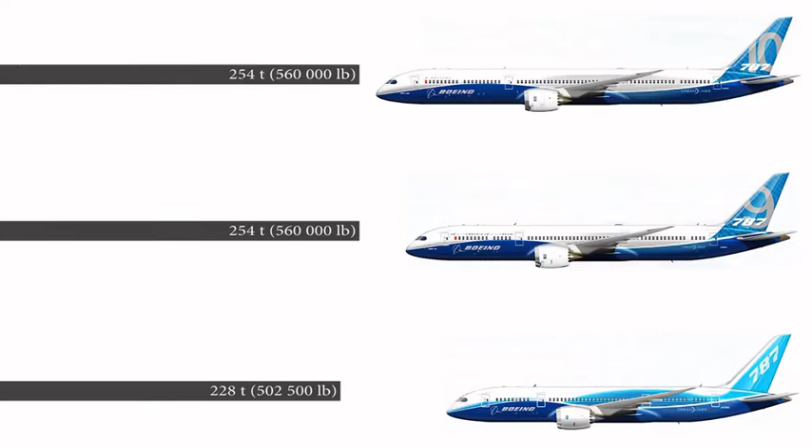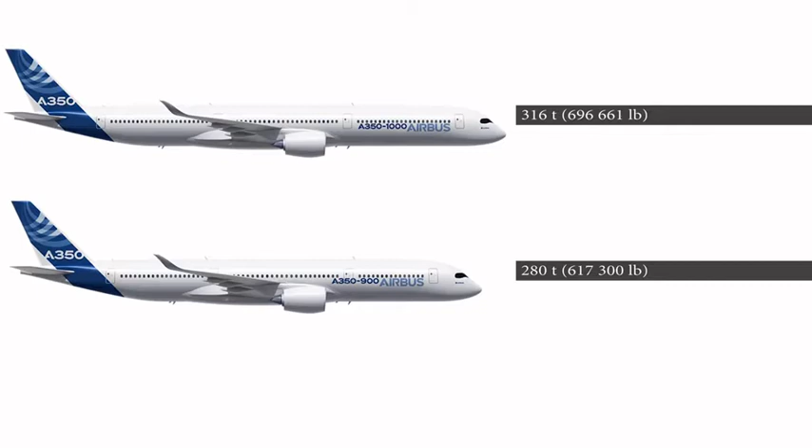Let's take a look at some figures. The Boeing 787 is a family that includes 3 models: 8, 9 and 10. Their maximum takeoff weights range between 228 to 254 tons, while the standard capacity in a 2-class configuration varies between 242 and 330 passengers. Since these planes were designed for long-haul flights, they have a maximum range of 14,000 kilometers, or 7,600 miles. Its counterpart, the Airbus A350XWB, is also a family that consists of 2 models, the 900 and 1000. Their maximum takeoff weights range between 280 and 316 tons, with a capacity of 315 and 369 seats respectively. Their flight range sits between 15 and 16,000 kilometers, around 8,500 miles.

So, what do we see here? The airliners of both companies coincide in their capabilities, but it is evident that the European brainchild is heavier, has a larger capacity, and flies farther than its quote-unquote rival. This can lead to the conclusion that, after all, the A350 is probably just better. There is no doubt that it is one fine plane, but the conclusion is wrong. The airliner does have a competitor.

It is not the Dreamliner, but its older brother, the Boeing 777. The Boeing 777 is the culmination of the twin-engine wide-body airliner concept, and it is also the biggest one of this kind. By the industry standards, the 777 is in the prime of its life. It is not the newest plane, but it is not even close to being old. This aircraft was developed in the mid-90s and kicked up a fuss by reimagining the market in quite a significant way.

Needless to say, in over 2 decades, this aircraft has undergone lots of upgrades, which nominally split it into 2 generations. The first one came about in the 1990s: the basic 777-200 model, its long-range modification 200ER, as well as the buffed-up Model 300. The second generation was born in the 2000s. The throne was inherited by an upgraded trinity: the long-range Boeing 777-200LR, the big boy 777-300ER, and the cargo 777F, which has a shorter range but can lift up to 102 tons of cargo. It is not the Galaxy, of course, but it's getting there.

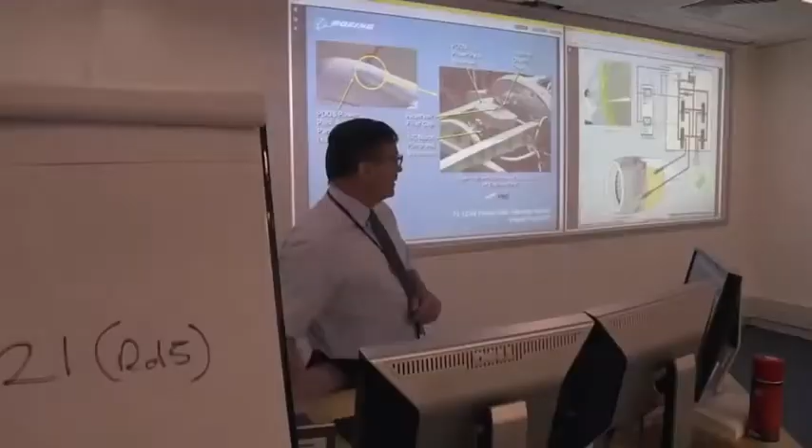The guys from Seattle became aware of this problem rather soon, and they started to develop a solution. The idea was simple: carry out a large-scale modernization of the 777 family, which would essentially result in the creation of the third generation. Better economy and flight performance had to be achieved with cutting-edge technological solutions, many of which could be borrowed from the Dreamliner.

The upcoming 777-8X had to replace the 200s, while the 777-9X would respectively replace the larger 300s. The competition in terms of passenger seats would be solved in the most obvious manner: each new model was a bit larger and had more capacity than their predecessors.

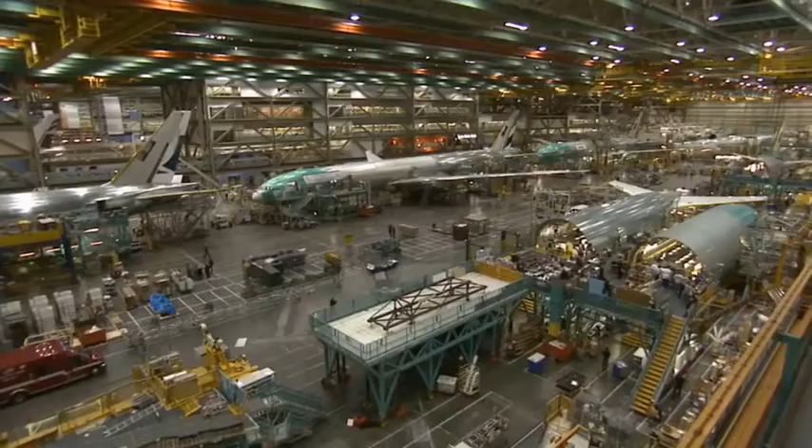Work on the project technically began in 2011, but was carried out silently and relatively slowly. Most of the resources were dedicated to finishing other programs. It was quite a busy time, but the project went on. Most of the Boeing divisions participated in its development, both in the US and abroad.

The 777X program was officially announced at the Dubai Air Show in 2013. That year, Boeing scored 259 orders, with a total cost of just under $95 billion.

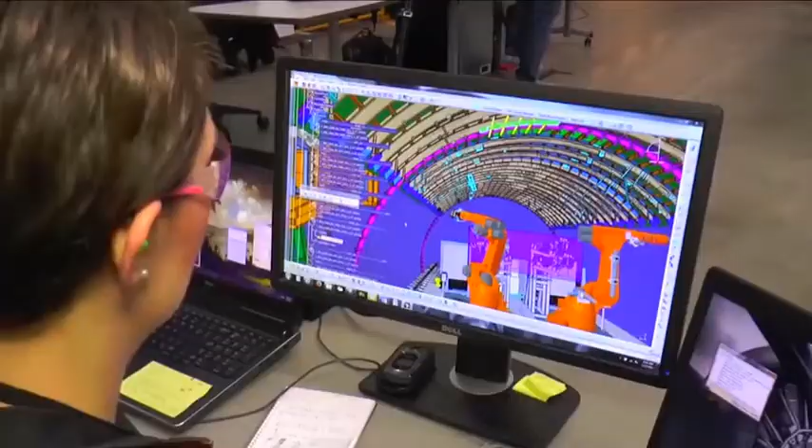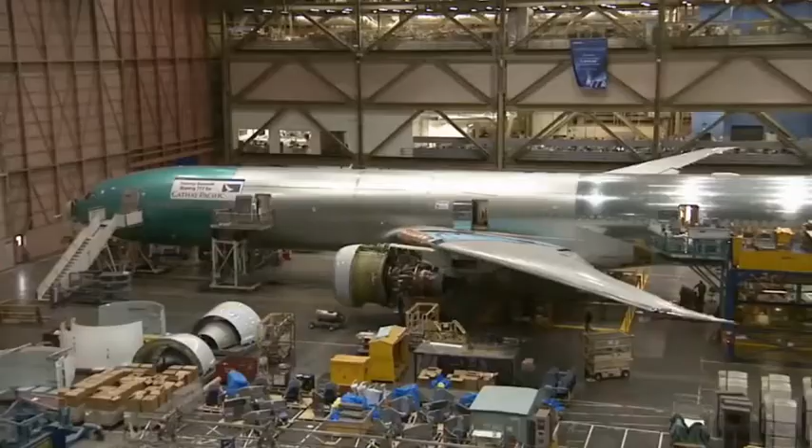The main stage of development lasted several years. The design of the basic 777-9 model was frozen in 2015, and it took another 2 years to prepare all the technical documentation, so construction of the first prototype began in 2017.

Design. Okay, let's take a closer look at what they've created.

In spite of being a cutting-edge plane, the Boeing 777X configuration remains committed to the classic configuration of commercial airliners. It is a wide-body aircraft with a slightly swept low wing, 2 turbofan engines suspended under the wing, tricycle landing gear, and of course a classic tail.

The first thing the aviators did to the fuselages was to stretch them, thus increasing their capacity. The old airliners of the version 200 have a length of 63.7 meters, or 209 feet, and can take in about 310-320 passengers in a two-class configuration. The Model 300 airframes are longer and more spacious, with a length reaching 73.8 meters or 242 feet, and a capacity of 396 passengers distributed in two classes.

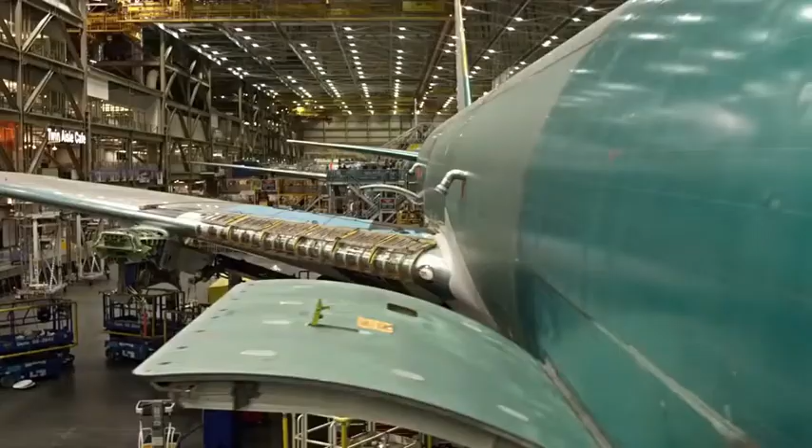Meanwhile, the airliners of the new generation have stretched fuselages, so they are a step above in terms of capacity. The 777-8 is 69.8 meters long and can fit 384 passengers in two classes. At the same time, the 777-9 has a length of 76.7 meters and is meant to take 426 people on board. It is the largest twin-engine airliner and the longest airliner overall. Even the 747-8 turned out to be shorter, just by a bit, but still shorter.

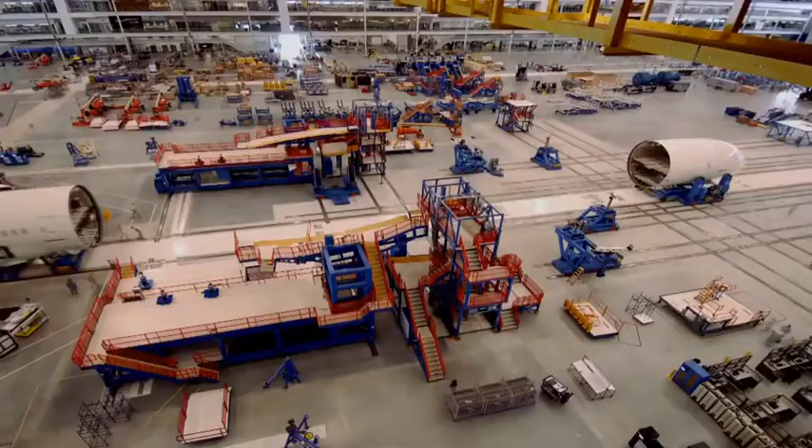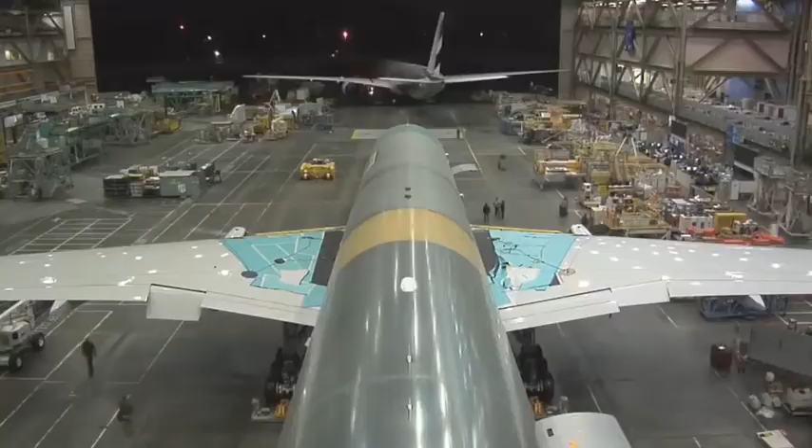The second stage was all about playing around with materials. Here Boeing showed its conservative side and did not rush to build a composite fuselage like with the 787. The Dreamliner is an entirely new airplane, and its airframe had to be built from scratch anyway. But the 777 is already here, with the manufacturing process set up and the industry already adapted to operate the classic versions. An overly deep modification would be an extremely complicated and costly enterprise, which obviously did not fit with the framework of the 777X program.

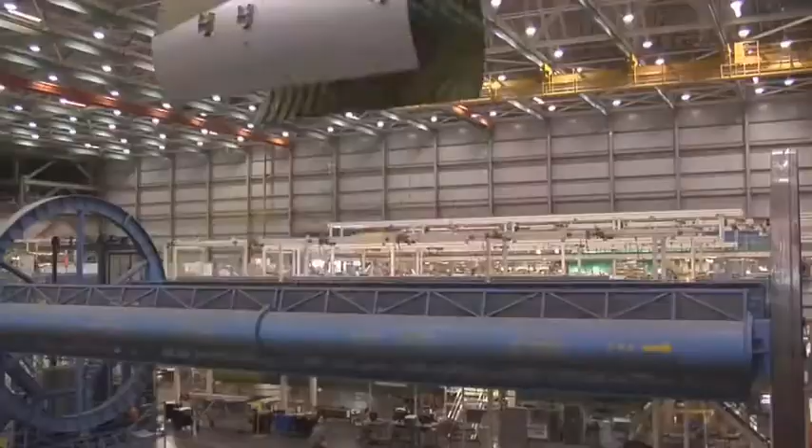After all, what we have here is a new generation, not a completely new plane. However, its fuselage is far from being the same. Most of the elements of both the structures and surfaces are made with new alloys. The amount of composites used is not beating any records, but they nevertheless allow the structure to be more light and optimized. The results of this work are seen both in figures and externally.

Let's begin with the bonuses for the passengers. Even though the diameter of the fuselage is the same as before, 6.2 meters or 20 feet and 4 inches, new materials and improved finishing allow the internal diameter to be increased to 596 centimeters, 234 inches, which is 10 centimeters more than before. Yeah baby, $5 billion were not invested in vain.

The second and more obvious bonus of using improved materials are the cabin windows. They grew in size by about 15% compared to the old 777s, and by a whopping 29% compared to the windows of the A350. It is a passion of all aviation companies to see who's got the biggest window in an airplane. Naturally, cool features like the electrochromic glass from the Dreamliner migrated here automatically.

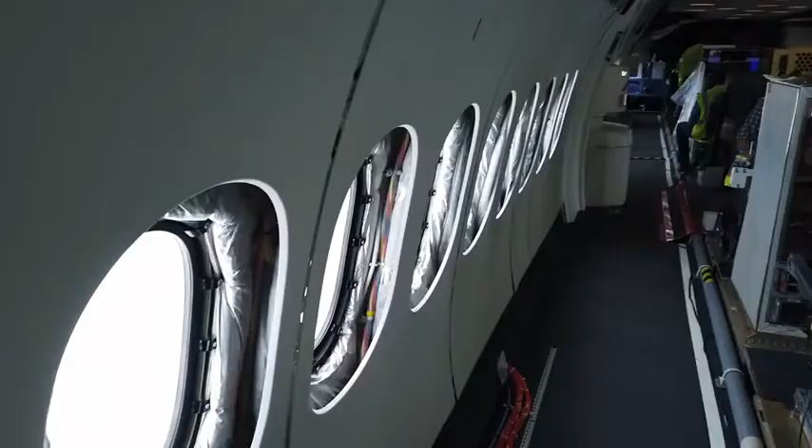Among other improvements there is a more silent cabin, new interior design, new overhead bins, illumination, temperature control, higher cabin pressurization, and comfortable humidity levels. All of these are benefits of the improved fuselage and some solutions inherited from the Dreamliner. You might not feel them right away, but on a 12-hour flight, these features may just come in handy.

The major innovation of the Boeing 777X is its new wing. It is almost completely made of carbon composites. On one hand, this allowed a reduction in the mass of the structure, and on the other, vastly improved the aerodynamic efficiency. Most of the solutions came from the 787, but here the wing is bigger, a lot bigger.

The wingspan of the Boeing 777X reaches 71.8 meters, or 235 feet. This is 7 meters more than in the airliners of the previous generation, and almost 3.5 meters more than that of the Boeing 747-8. Essentially, the wings of the new 777s are larger than any manufactured before by Boeing.

Such an elongation drastically improved flight performance, but became a problem on the ground. In ground operations such as taxiing, parking, and entering the hangars, the dimensions of the plane are of great importance, especially the wingspan. The biggest airplanes, such as the Boeing 747, Airbus A380, AN-124, and the C-5 Galaxy, require lots of space. This creates additional operational requirements and limitations, increases operational costs in the airports, and at the end of the day, makes life harder for the pilots and ground crews.

In this regard, the Boeing 777 had an easier time, with its wingspan of just under 65 meters, 213 feet, and it felt completely comfortable among such machines as the A340. But with the new wing, it would not fit in those old spots, which could lead to serious costs for the operators. Nobody even thought of making a smaller wing, as it would downplay the benefits of using composite materials.

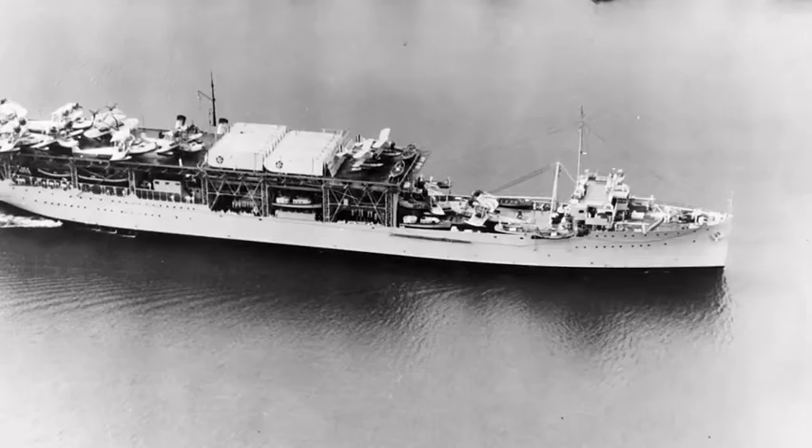So the aviators came up with a breakthrough solution, which was implemented 100 years ago in naval aviation. Aircraft carriers are some quite cramped airfields, and the airplanes on board are fitted with folding wings. This is what Boeing decided to do with the wingtips, which greatly increased the wingspan of the 777X while being relatively simple and light.

The new wingtips are attached to the wing with hinge fixing and can be lowered or retracted by electric drives. They have several strong locks that reserve each other, so that the wingtips wouldn't fold mid-flight. The configuration is changed while on the ground, before takeoff and after landing, and it takes roughly 10-11 seconds for the wingtips to fold, or around 20 seconds if we include the time needed for them to lock in position.

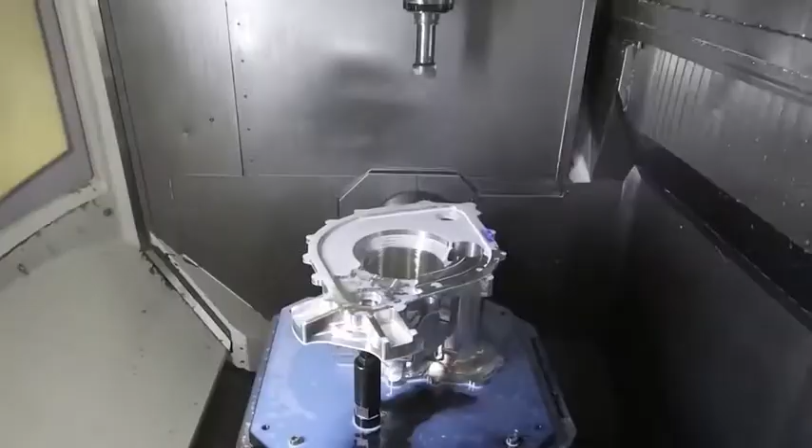The new mechanism and lots of additional metal do not simplify the aircraft, but make it much more interesting and solve the problem of the excessive wingspan. The unfolded wing has a span of 71.8 meters, which goes down to 64.85 when folded. This is 15 centimeters under the limit of the almost biggest airplanes category E, usual for the 777s.

The rest of the high lift devices are not as exotic. Big flaps, slats extended throughout the entire wing, ailerons and spoilers. More or less the same stuff you find on other planes. Rather simple, but still beautiful.

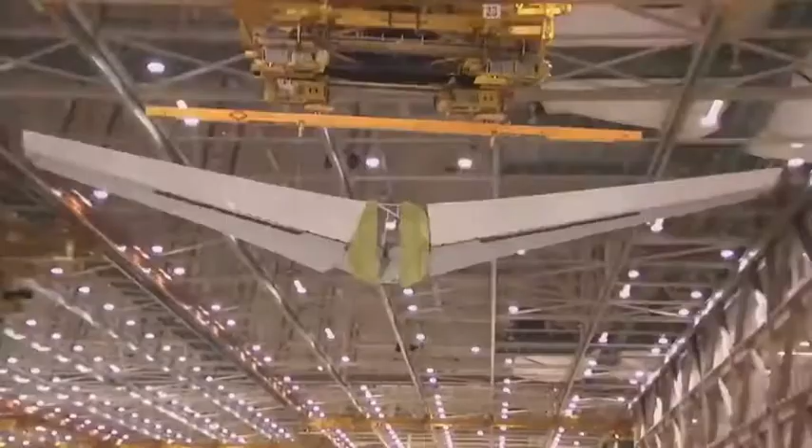The empennage is also almost entirely made of composite materials, and features lots of solutions found on the Boeing 787. But only to a certain extent, it has a somewhat simpler design. For instance, the hybrid laminar flow control systems on the tail stabilizers developed on the Dreamliner don't seem to be used here. Laminar surfaces are used on the engine nacelles, which, considering their size, improves the aerodynamics.

What's interesting is that in spite of all this fiddling with the structure, the maximum takeoff weight of the Boeing 777-8 and 9 is the same as that of the 777-300ER, about 351 tons. Technically, that is quite possible.

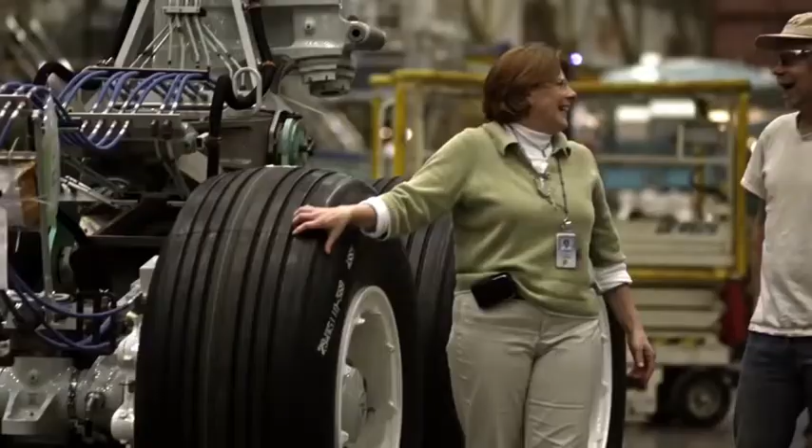The airplane got bigger and heavier by itself, but at the same time its structure got less dense, and its efficiency allowed a reduction in the amount of fuel needed. But it is still hard to believe that the figure turned out to be exactly the same. Perhaps this has to do with some certification or operational specifics, or it might have to do with the capabilities of the landing gear, which was barely changed. Or maybe there is some symbolic mysticism to all this.

351.52 tons is roughly 777,000 pounds.

Finally, we come to the burning heart. One of the particularities of the 777 is the killer ratio between the impressive size and weight of the aircraft and the fact that it has only two engines. From the moment of creation, these engines were record-breaking with their huge size and corresponding thrust. But the truth is that it also created a problem.

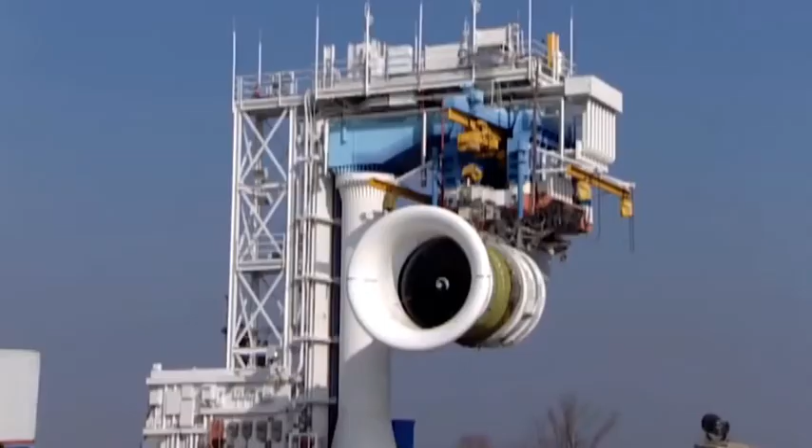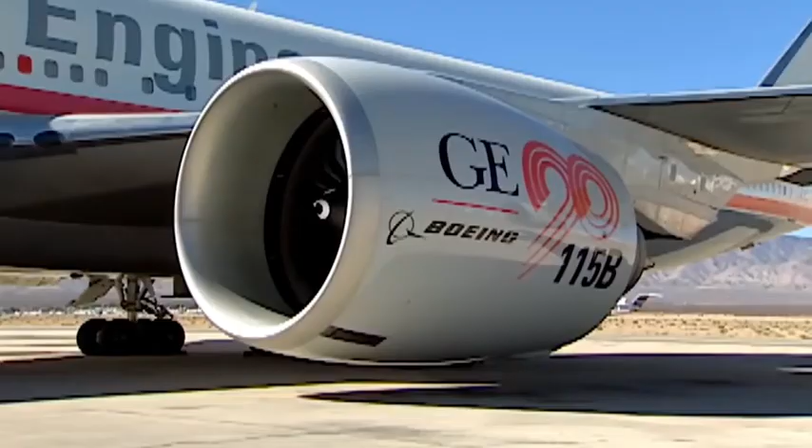Such engines are incredibly complex and expensive, and while the first-gen 777 had engines from Rolls-Royce, Pratt & Whitney, and General Electric, the second generation was left only with GE, with their mammoth GE90. The same happened to the new generation. Only the General Electric brainchild will reign under the wings of these giants.

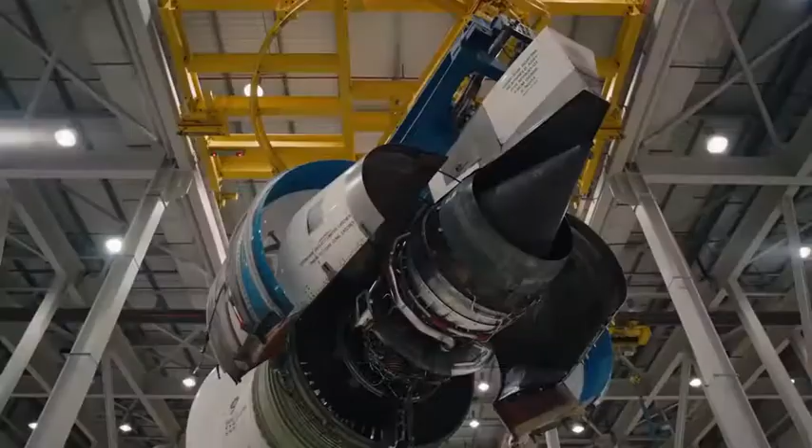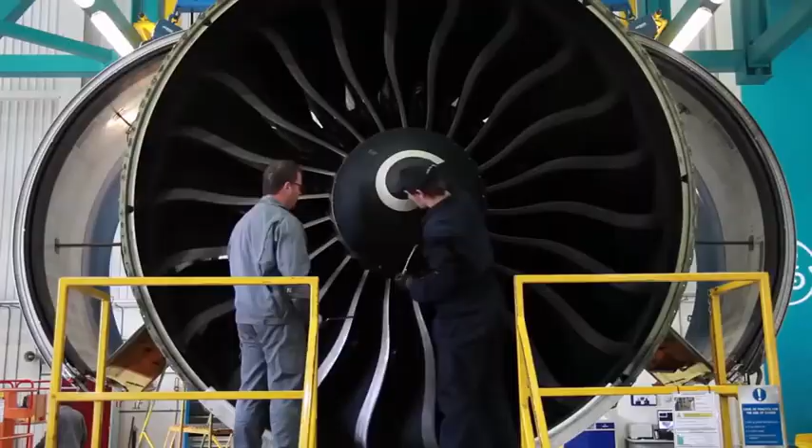Cost efficiency was mostly achieved using the old and tried trick of increasing the bypass ratio. The GE9X got a 340 cm, or 134 inch wide fan, which is 15 cm more than that of the GE90. This made the already huge engine even bigger. The size of this monster is well pronounced when you see it hanging under the wing of the Flying Testbed 747, next to the standard jumbo jet engines.

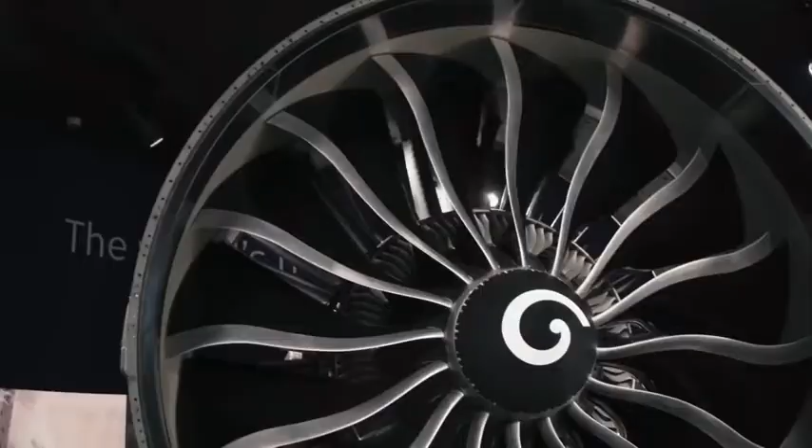The fan by itself is a masterpiece. It is made up of only 16 huge composite blades, which allow the engine's weight to be reduced and the rotation speed to increase. But this was not enough. The already huge fan could not be enlarged by much. Even those 10 centimeters required a considerable effort.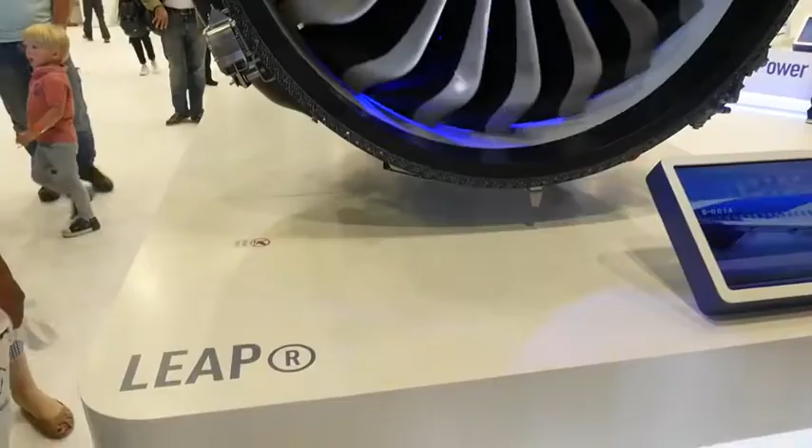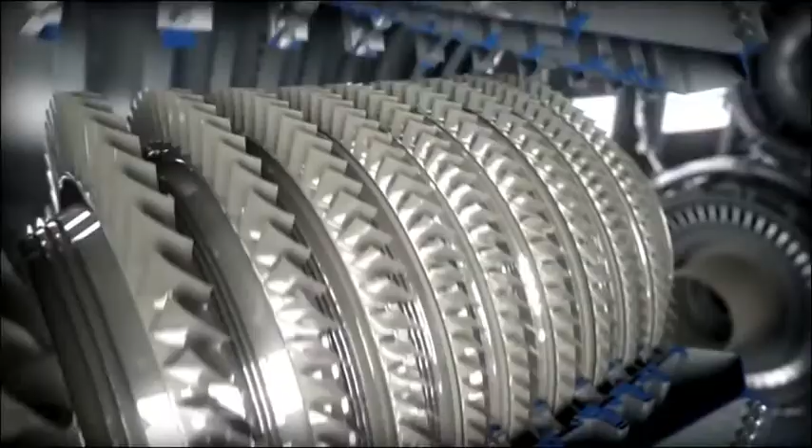In order to increase efficiency, the engineers adopted some technical solutions that had been tested on the CFM LEAP engines. First of all, they made the already tough spools even more active. The tuning was applied mostly to the high-pressure compressor, which got as many as 11 stages. To keep an even higher pressure and temperature, all the elements had to be reworked, implementing more heat-resistant alloys and ceramic composites, as well as mastering 3D printing of some components.

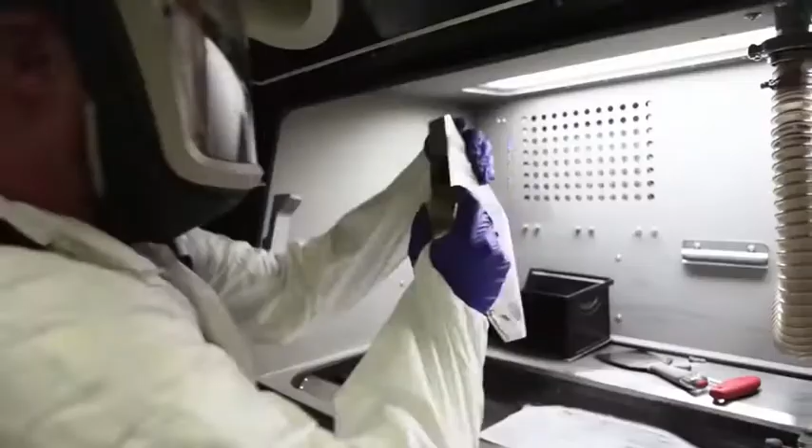The result was obvious. The compressor reached an overall pressure ratio of 60:1. This is quite a wild figure, as the GE90 has a ratio of 42:1. At the same time, the bypass ratio grew to 10:1.

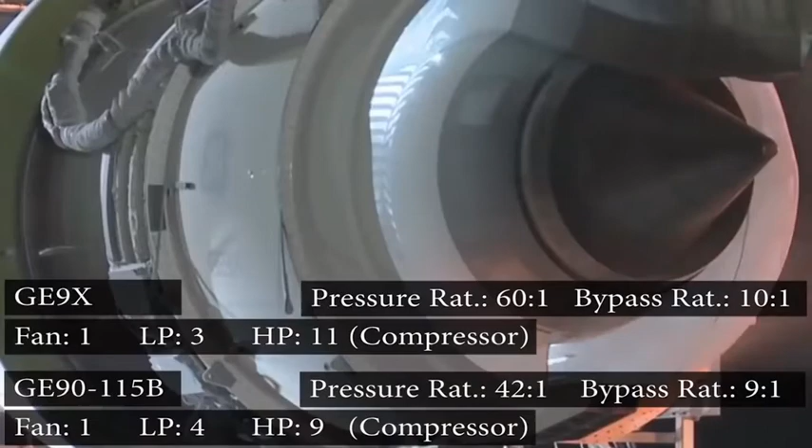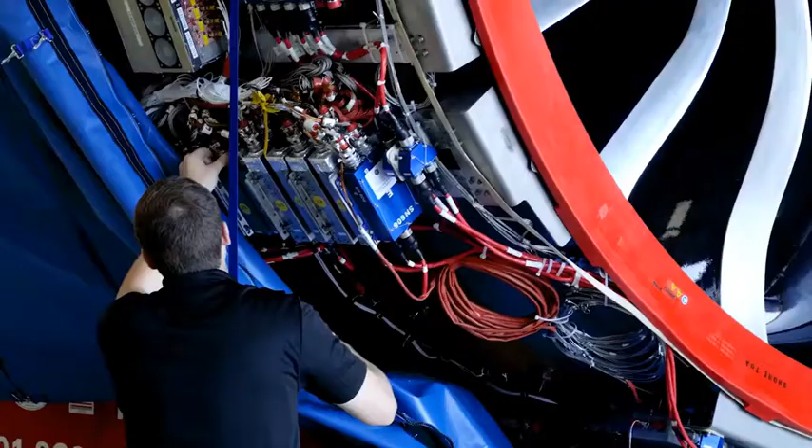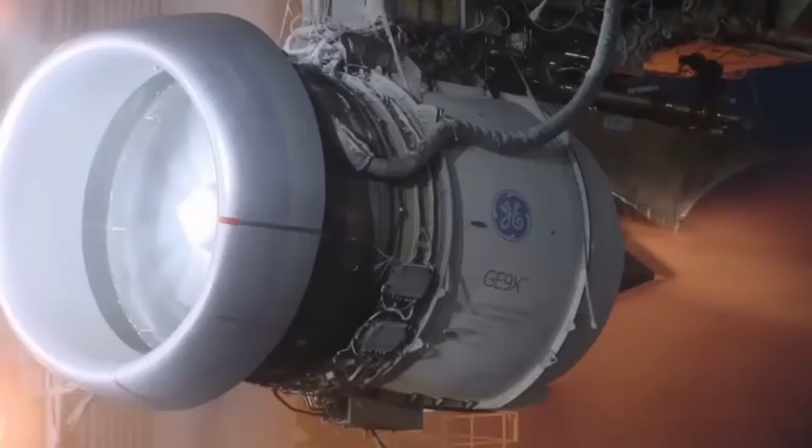I purposefully did not bring up the topic of power. The usual operational thrust of the GE9X engine is 470 kilonewtons, which is a bit disappointing because the older GE90 from the 777-300ER model generates as much as 513 kilonewtons. Calculations showed that 470 kilonewtons are more optimal for the new airliner. However, during limit performance testing, General Electric managed to squeeze out of this engine 596 kilonewtons, 134,000 pounds, or 60 tons of force. The record is official. This is the biggest and the most powerful jet engine ever made. GE confirmed their awesomeness, and at the same time, showed the prospect of forcing the engine further.

Yet another interesting challenge was the avionics. On one hand, it had to be cutting edge, after all, it is a flagship airliner. On the other hand, the continuity of generations had to be preserved, along with the closeness to the other planes of the company. The mission was more or less accomplished.

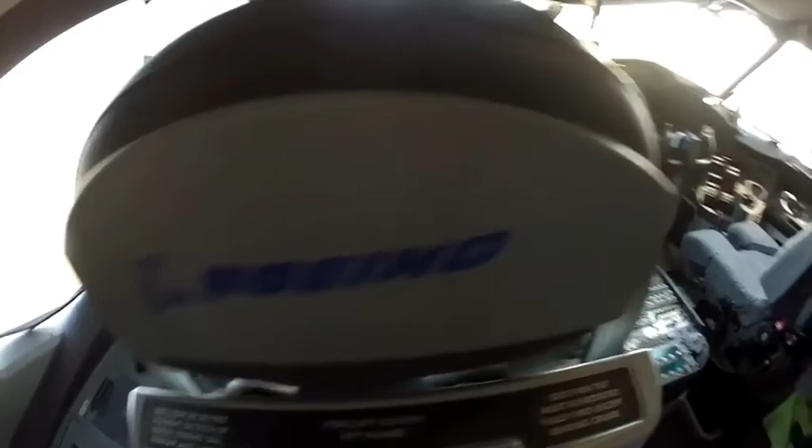In terms of controllability, the 777-9 had to resemble the 777-300ER, while most of the ergonomic solutions were adopted directly from the 787, including cockpit design, instrument positioning, seats, and head-up displays. Essentially, Boeing ends up having two families of wide-body airliners with practically identical cockpits, which simplifies both manufacturing and aircraft operation. Still, there are some innovations.

The interface is made up of 5 large 15-inch displays. At first glance, everything is familiar, the same can be seen on many modern airliners, with the exception of one aspect: all of these displays are touchscreens, full-grown sensors supporting multi-touch like on a tablet. This is supposed to make the controls more intuitive and reduce the number of instruments.

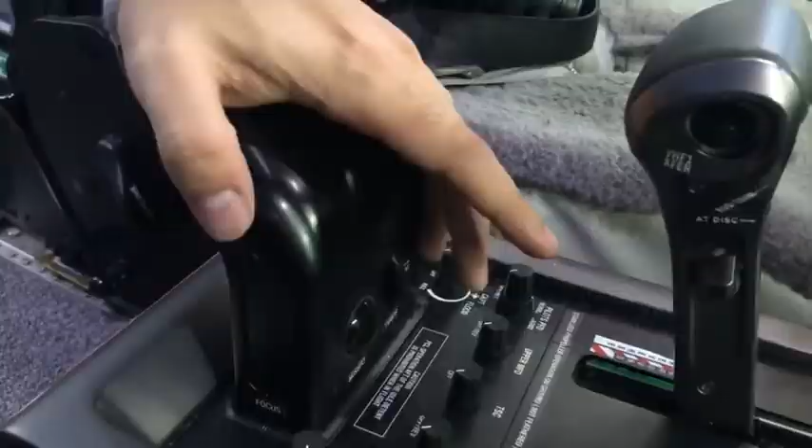This really is quite an innovative solution. Even the newest interfaces are controlled at best by cursors, while touchscreens are used only on secondary instruments. But let's be honest, sooner or later we were bound to see this. The majority of the remaining upgrades are related mostly to the expansion of automation possibilities, takeoff and landing aids, advanced navigation, and autopilot. Boeing remains loyal to its traditions, and despite the implementation of new solutions, the classic yokes are still proudly standing in their place.

All of these solutions are supposed to make the Boeing 777X a new leader. The main bonus of efficiency in the new generation airliners is of course their engines, which should provide a 10% reduction of operational costs and emissions. Better alloys and composites, along with improved aerodynamics and weight reduction, make quite a contribution.

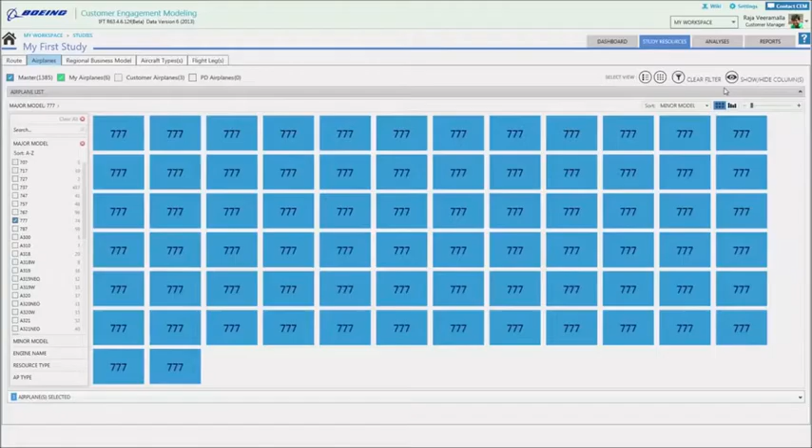The competitiveness is also boosted big time by the increased capacity. The amount of fuel burned per seat, according to Boeing, can decrease by 20% compared to the previous generation. Of course, the guys from Seattle don't forget to mention their main competitor, and emphasize that the Model 8 will be 4% more efficient than the A350-1000, and the Model 9 as much as 11%. Real-life operation by airlines will show if these statements are true. That is, of course, if the airlines will share such data.

Let's take a quick look at the existing and planned modifications. By now, there are two main models of the airplane, the 8 and 9. The Boeing 777-9 is the basic model of the 777 family of the third generation, and for now, the bigger brother. This aircraft is meant to replace the 777-300 airliners, but it is longer and has a greater capacity. Since this is the basic model, it was a starting point. All of the initial prototypes were the 9s.

The Boeing 777-8 is a shorter version of the Model 9 that can be considered the successor to the 777-200, and is presented as the main competitor to the A350-1000. It is quite possible that there will be a version with an extended range, so it could compete with the A350 ULR. This should be a Model 8 airliner with an increased maximum takeoff weight due to it carrying more fuel and with range exceeding 17,500 kilometers or 9,400 nautical miles.

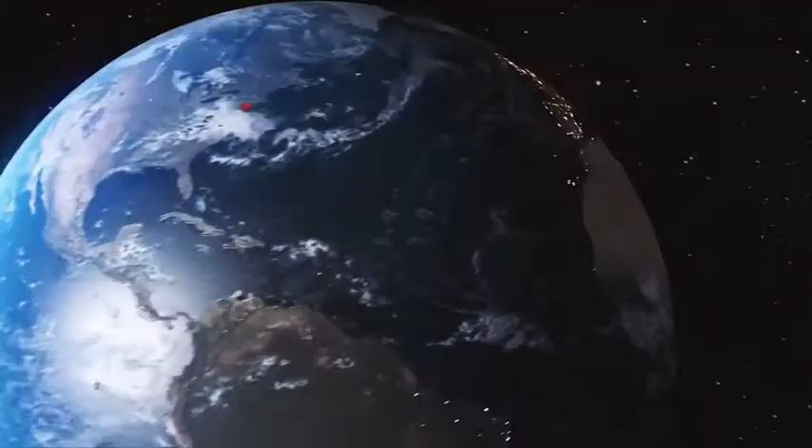The plan was to launch the 777-8 model a couple of years after the Model 9. But taking into consideration the current circumstances, most probably this will happen closer to 2023, and its modifications will come out only by the middle of the decade. This, with all the prospects, is leaving Boeing without the time to take its place in the ultra-long-range flights niche, which is being actively seized by the A350 ULR.

Of course, just like the cargo 777F was made on the basis of the 777-200LR, similarly the 777XF or 8F should be based on the Model 8. Its specifications are unknown by now, but most probably they will be close to the current freighters, with a better economy.

777-10. For now, this is a purely theoretical project of a stretched version of the Model 9. An 80 meters long aircraft capable of taking in 450 passengers in a two-class configuration has the potential to compete with the four-engine flagship airliners, the Boeing 747 and A380. Considering that these dinosaurs are obviously losing positions, the demand for a new airliner may quite possibly arise. And if that happens, the rest would be just a formality.

And obviously, the BBJ 777X, the super VIP jet that can be created on the base of the mass-produced airliners. With cabins as large as 302.5 and 342 square meters, and ranges of 21,500 and 20,400 kilometers respectively, the BBJ 777-8 and BBJ 777-9 can become a new definition of the word excess.

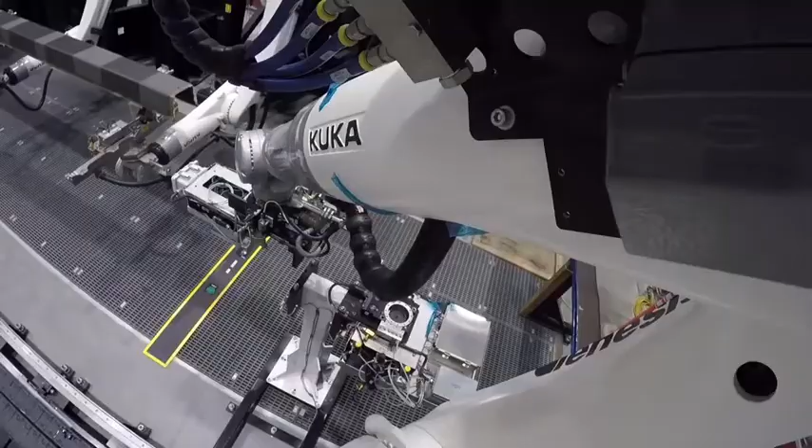Let's get back to the adventures. In spite of a certain degree of conservatism, this aircraft required quite a considerable modernization of the production lines. The main step was to build a large plant for composite elements in St. Louis. As a matter of fact, this is quite a step forward for the locals.

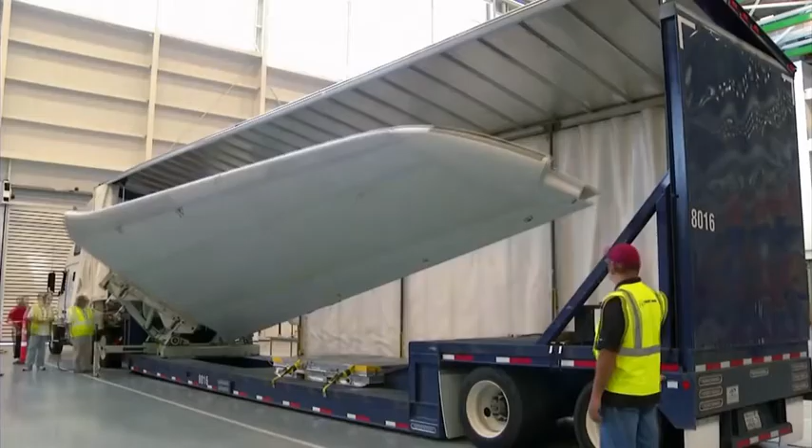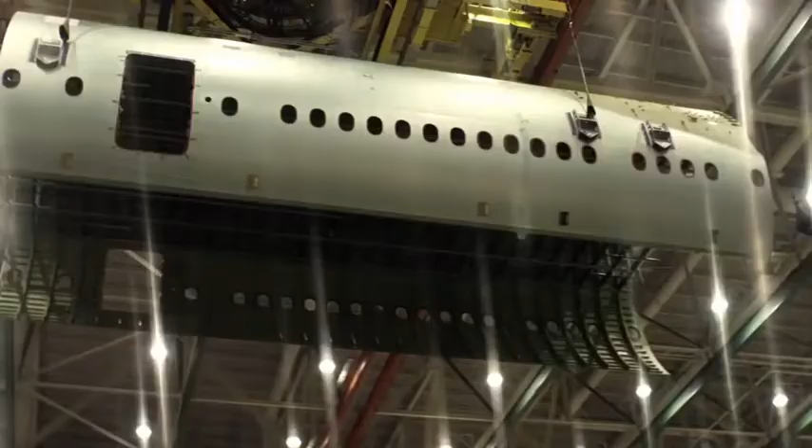When building the 787, many of the elements came to the US already assembled in Japan. Now, in the case of the 777s, the degree of localization is increased. The final assembly is carried out in Everett, Washington, the motherland of the 777s, where the production site also had to undergo a considerable modernization. The arrangement of production turned out to be a real industrial dance for Boeing. In the years to come, they will have to maintain a simultaneous production of the second and third generation airliners.

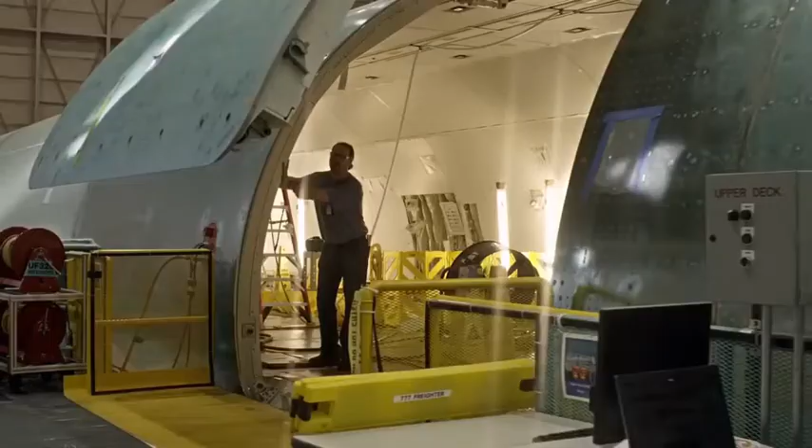Plus, the conversion of passenger planes into cargo freighters is a popular option. These are old ideas. With the current crisis and plummeting demand for airliners, the production rate will most probably have to be reduced. Previously, the company maintained a pace of 5 planes per month, but now it's planned to be reduced to 3.

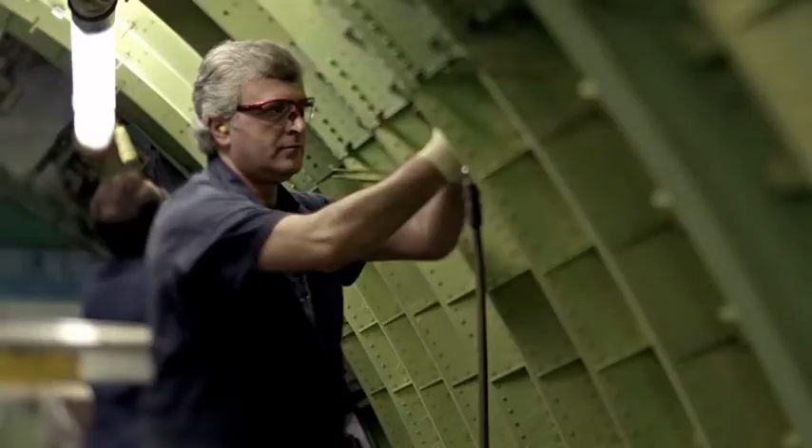The project development was not going smooth either. Ground tests of the GE9X engines revealed a series of issues, and the necessary tweaks delayed the flight tests of these engines on the Boeing 747 testbed. As if that wasn't enough, there were also difficulties with setting up production of the airliners themselves, all of which had to be solved quickly. The schedule was already stretching like rubber, which was not thrilling for the customers.

The rollout ceremony for the first prototype took place in March 2019. It was a humble event, mostly attended by company employees. After the crashes of the 737 MAX airliners, it wouldn't be right to show off too much. On the other hand, the event was important. Boeing had to prove to everyone that, in spite of all the problems, the company is alive and moving forward.

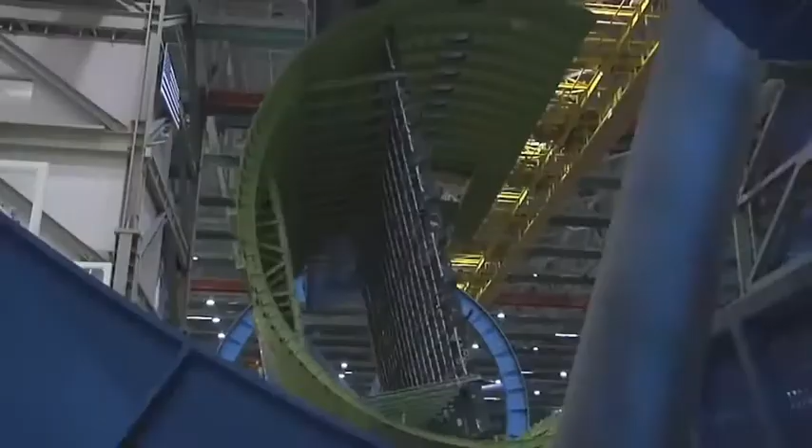The next pothole in the airliner's past was the fact that the airframe that was supposed to crash under maximum overloads did crash, but not at maximum. On the final testing stage, the fuselage did not withstand and basically burst open, leaving a huge hole in the hull and ejecting the tail door.

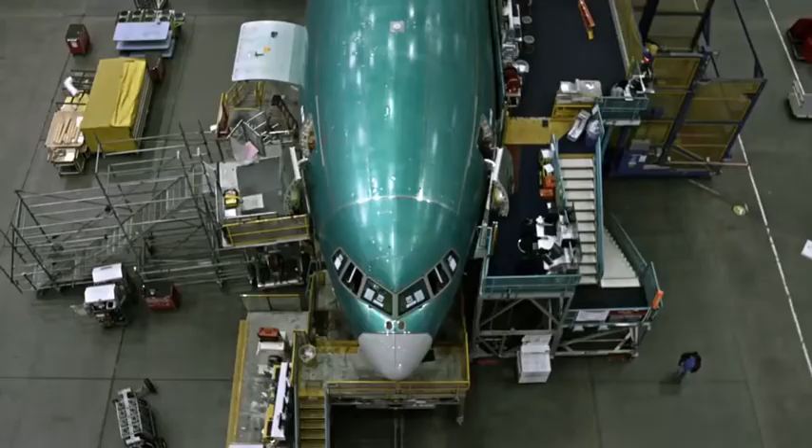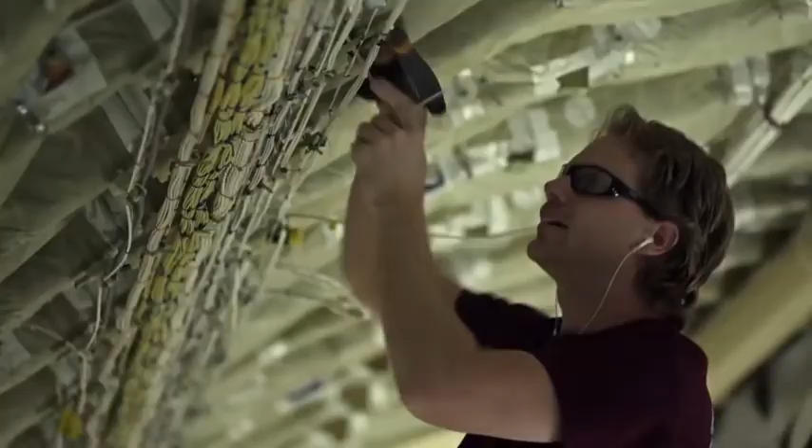When creating the 777X, Boeing was trying to bring its comfort to the level of the 787. As it turned out, it's not that easy to achieve the capabilities of a composite fuselage on an aluminum one, and in some points its strength just wasn't enough. Apparently the aviators decided there was no need to repeat the tests, and they have enough data to understand what part of the structure needed to be reworked in order to achieve the desired specifications.

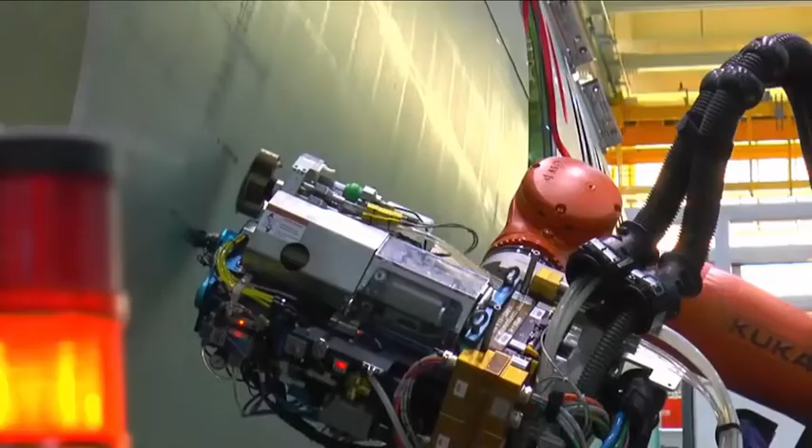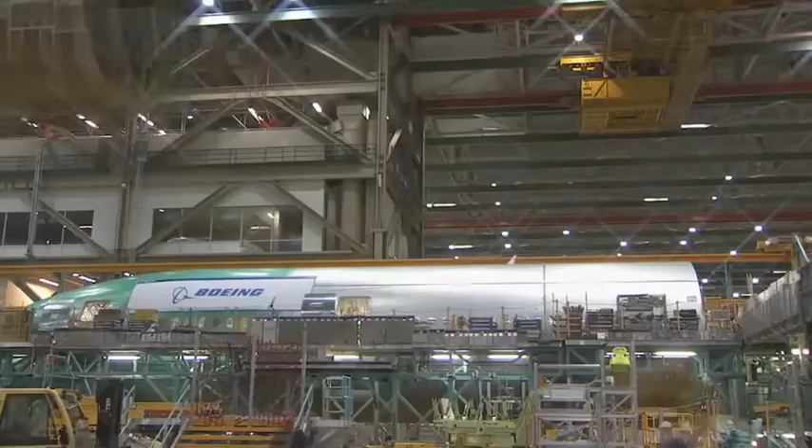The situation is a bit unsettling. On one hand, there were cases with rushed certification and tragic results. On the other hand, the airframe did withstand 99% of the test stress load, and in reality, to face that kind of structural stress, you'd need to put the airplane in some infernal flight conditions. In any case, Boeing is now in the crosshairs of everyone interested in aviation, so I doubt the company will be taking any new risks.

The 777-9 model made its maiden flight in January 2020. The aircraft took off from Paine Field Airport at the Everett plant, and after spending 3 hours and 52 minutes in the air, it landed at Boeing Field Airport in Seattle. The second prototype took off on April 30. The third plane is already undergoing pre-flight ground tests, and the fourth one should join the party soon.

In total, 6 prototypes should take part in the flight tests, 4 aircraft of the version 9 and another 2 of the version 8. We should be able to see the whole team by 2022, which is when shipping of the Model 9 to customers should already start.

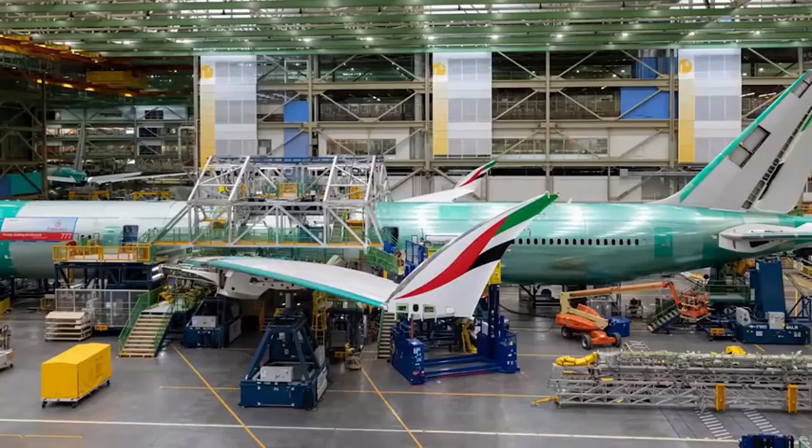The catalog price in 2020 reached $410 million for the 777-8 model, while the 777-9 has a price tag of $442 million, making it one of the most expensive airliners ever produced by Boeing. Even the 747-8 turned out to be cheaper. Yet even with such prices, Boeing has an ordered portfolio of 309 airliners for 9 operators. Naturally, most of them are bound to be delivered to the Middle East and Asia. The European customers are Lufthansa and British Airways, looking to replace their older Boeing 747s and A340s. What's curious is that the airlines from America are nowhere to be seen in that list.

The era of the 4-engine mammoths is becoming a thing of the past, and their heirs, the twin-engine giants, are starting to reign the skies all over the world. Their size, capacity, comfort, range, and reliability are already becoming mundane, even though not long ago they seemed amazing. And the flagship of this new era in the beginning of the 21st century will be precisely the Boeing 777. Well then, long live the king!